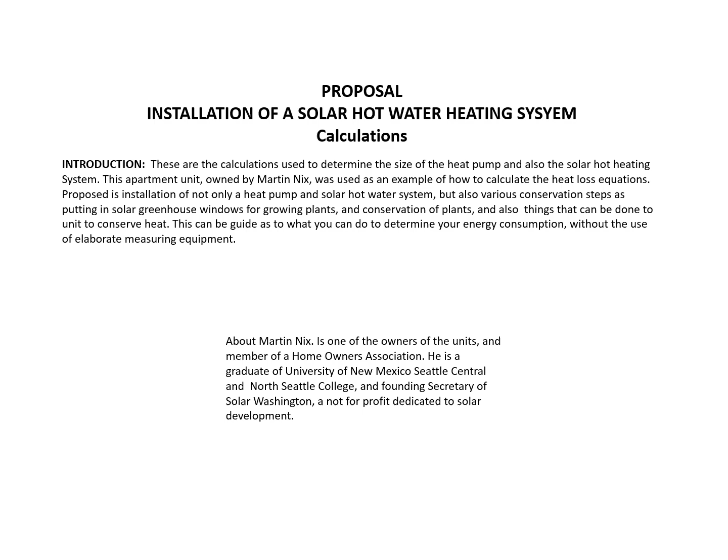So what I'm doing here is I'm looking at how big of a solar hot water heating system I can use and how much heat pumps. And I'm going to talk about other things that you can do to make the house more energy efficient. I took my bills and I looked at how many kilowatts I was using for each month. I don't have natural gas, so this is an all electric unit.

So my highest was about 6 million BTUs per month. My lowest was about 1 million or about 2 million BTUs per month, which gives me a range. You know, wintertime you tend to use more electricity because you got electric heating. So that just gave me a few ideas of where I'm looking at.

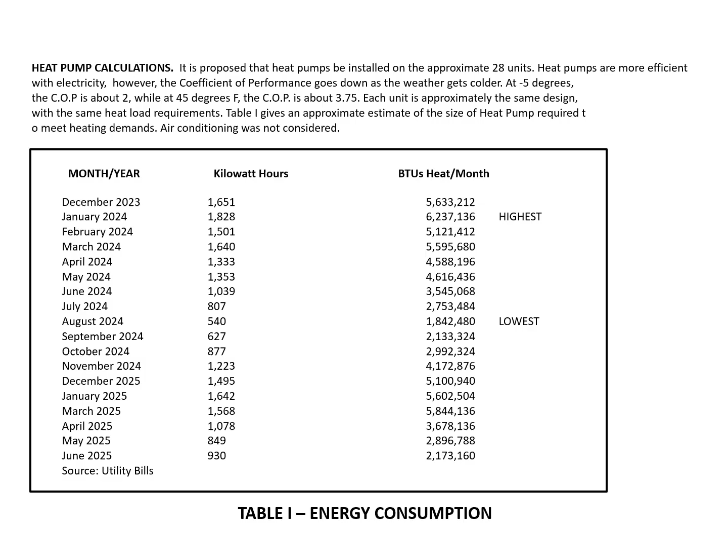To convert kilowatt hours to BTUs, let me put it this way. For every kilowatt out there, there's about 3,000 BTUs. BTUs is a measurement of heat, and kilowatts is more of a measurement of electricity. So here I looked at how much energy is used by my furnace. And by looking at the differential between the highest and lowest, I decided that 29.5% of the heat is used by my furnace to keep the unit warm, or about 30%.

So it just gives you an idea of how you can take your electric bill and come up with how much electricity is being used to heat the place in the wintertime. And I looked at my circuit breaker. I calculated how many kilowatts I'm using, and then I converted it from kilowatt hours to BTUs. For my main, which is the whole house, my house is rated at 22 kilowatt hours,

which is huge. The furnace was 74, the range was 37, and then I had central vacuum, lights, dryer, hot water heater was big, kitchen plugs was big, disposal and lights. Basically, the furnace is the biggest unit, the hot water tank is the biggest unit, and the reason why they do kitchen plugs is because they got a lot of things people plug in that consume a lot of electricity.

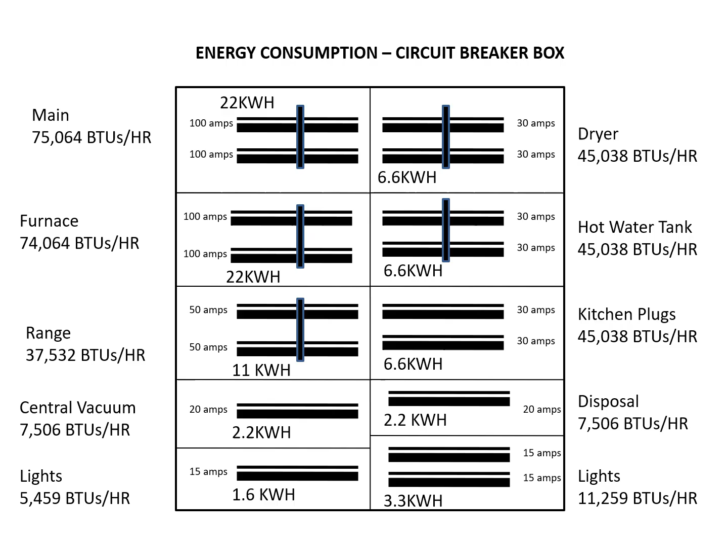Each unit here consumes 22 kilowatt hours, and let's put it this way. The electric utility is kind of concerned that we might melt the power line, so consequently there's talk about trying to put in heat pumps and solar hot water heating systems. There are things that can be done.

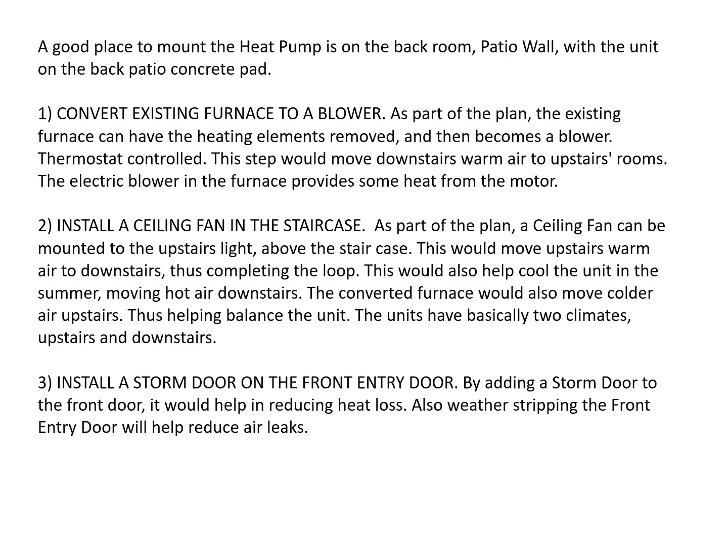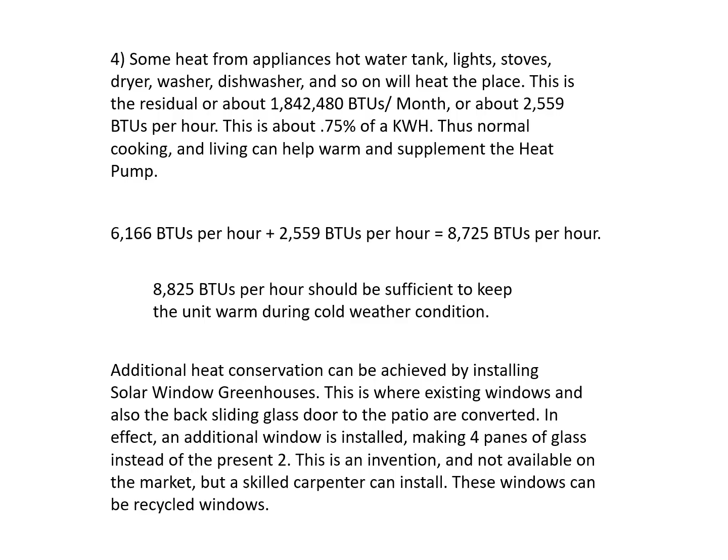If we install a heat pump, we can take the existing furnace and make it into a blower only, install a ceiling fan since I have a double-decker unit, and that way I can blow hot air downstairs and cold air upstairs. Install a storm door. You can also do this to windows, but a storm door would save a lot of heat going out through the front door. And something else too, your appliances, your stove and your washing machines add a little bit of heat to the building.

Things I'm doing is calculating the surface area. I need to know how much surface area I have for my windows, surface area for the wall, surface area for the roof, and surface area for the floor. And then I do a rough calculation as to how much heat's going through the walls. It's called the R value.

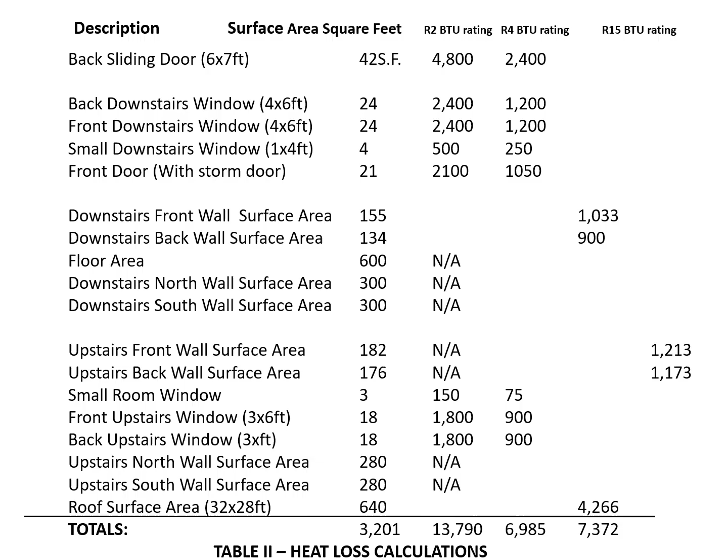So what I did is I calculated what would happen if I added a solar window greenhouse to all the windows, and it gave me a 32% efficiency. Basically, I'm putting a little greenhouse to grow plants on each one of the windows. It also adds an extra layer of glass.

And so then I made a worst case analysis as to how much heat would be lost through it. I assumed that the worst case would be negative 20 degrees in the winter, and that's like a really bad winter storm. I took a guess at how much hot water heating, 60 gallons per day, 120 gallons per day, and then I calculated what the solar potential was.

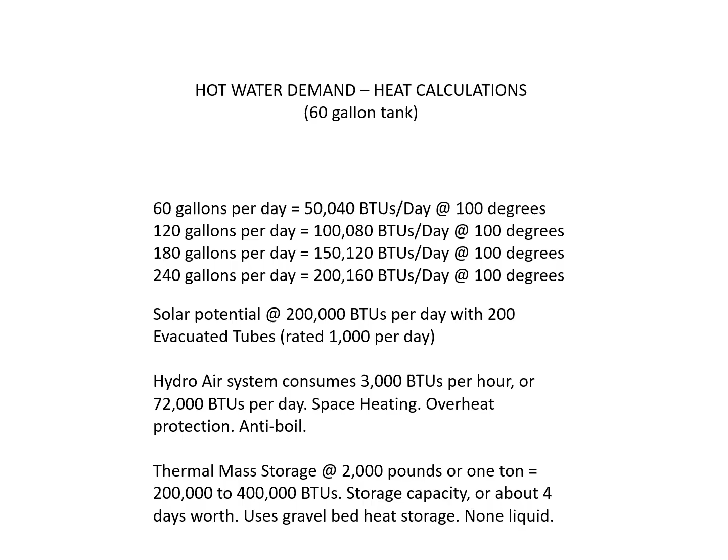200 evacuated tubes. Each one is rated 1,000 BTUs per day, and I'm also using some of the hot water to heat the house. So this gave me an idea of how much demand I need for hot water from a solar hot water heating system. And just as a big guess, I figure the house weighs 300,000 pounds or so.

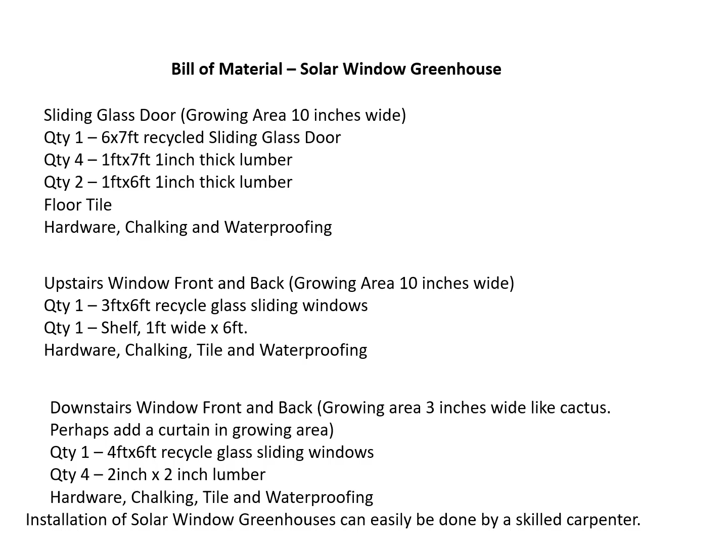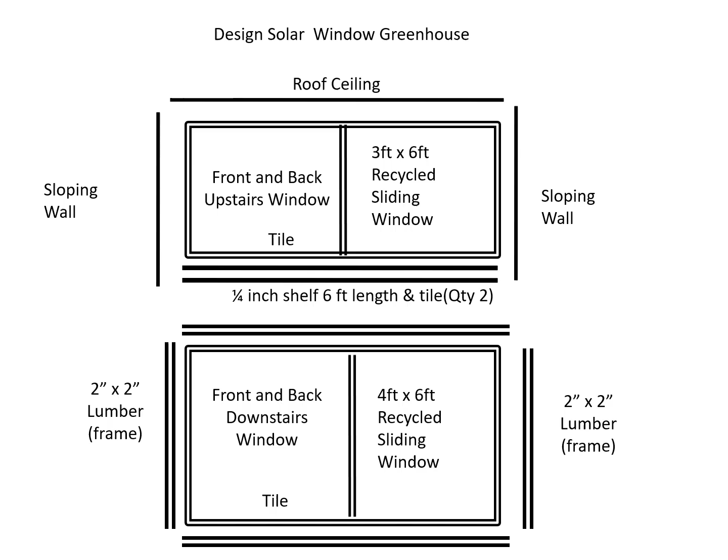So one of the things I want to do is convert the greenhouse windows, and so I went through and calculated how much heat would be conserved if I was to convert the windows to be solar greenhouses. And this is a bill of materials. Basically it's really simple to do. A good carpenter can do this. You basically take recycled windows, put them in there, frame it, and that way you are able to grow plants in your window.

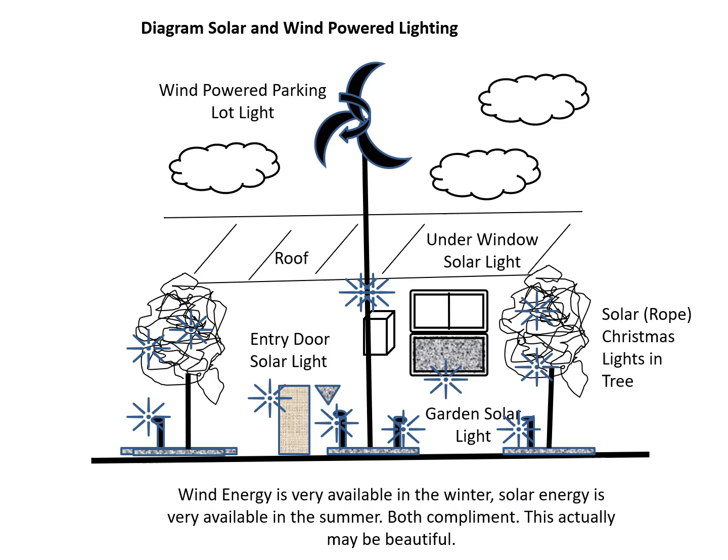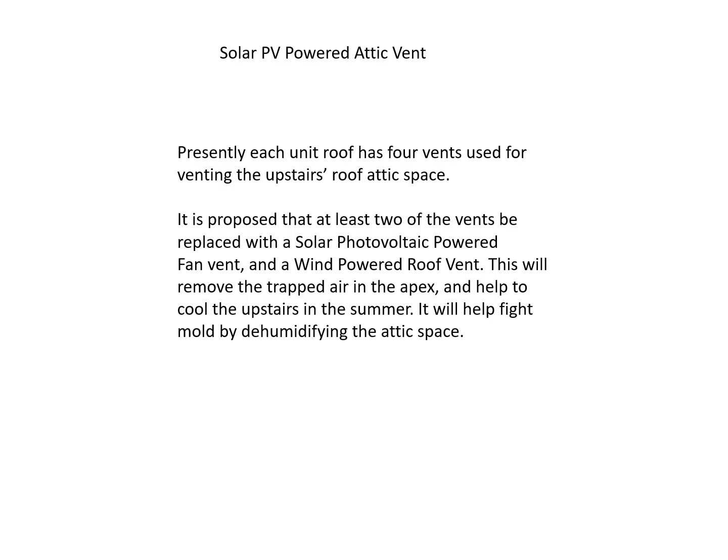Outside, what can be done is solar lighting, and also a windmill that will do lighting. Windmills tend to give more light in the winter time, and solar more in the summer. And so here's a little sketch of what it could look like. And then a solar powered attic fan to keep the roof cool. And then things you can do for fire prevention. Every energy plant should have fire prevention integrated.

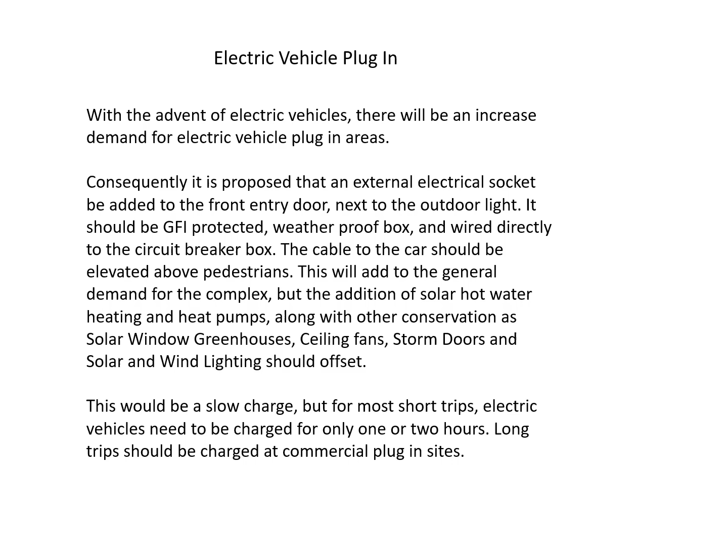Electric vehicle plug-in. You can put in just a regular plug outside, wired directly to the circuit breaker box, and then you can have 1 kilowatt. That'll be a trickle charge. And so after you've done all these calculations, now you size the solar hot water heating. As it ends up, I have close to 100,000 to 200,000 BTUs potential on my roof, and then you use the solar PV panels for the pump.

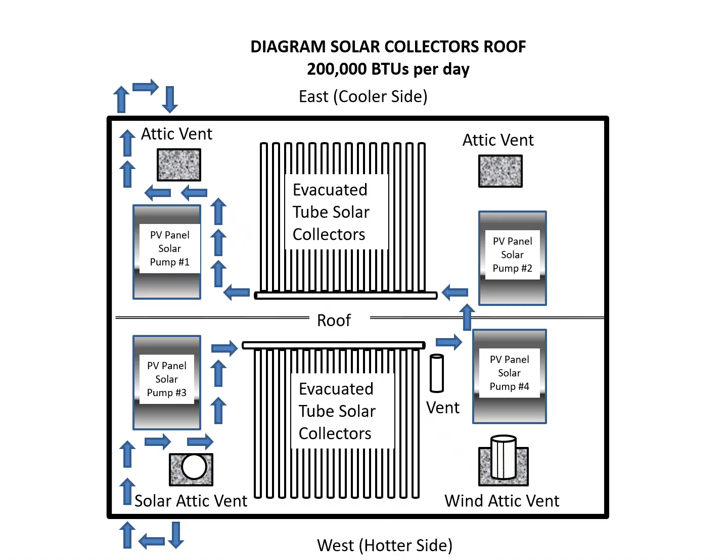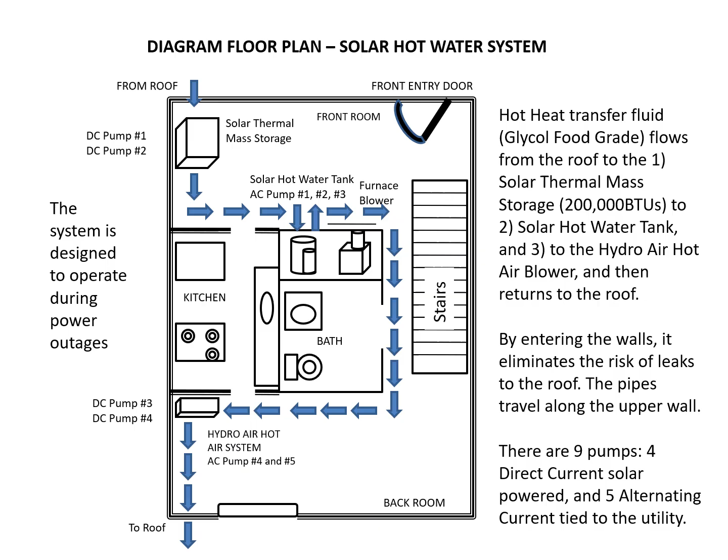And then I route it through the wall, not through the roof. That way it keeps me from leaks. And then I route the pipes along the edge of the walls to the solar hot water heating system, and then out the back. And then I have a hydro air hot air system which can heat the back room. And then I add thermal storage and a couple of pumps to route the heat transfer fluid through a gravel bed. That way I don't have to worry about it.

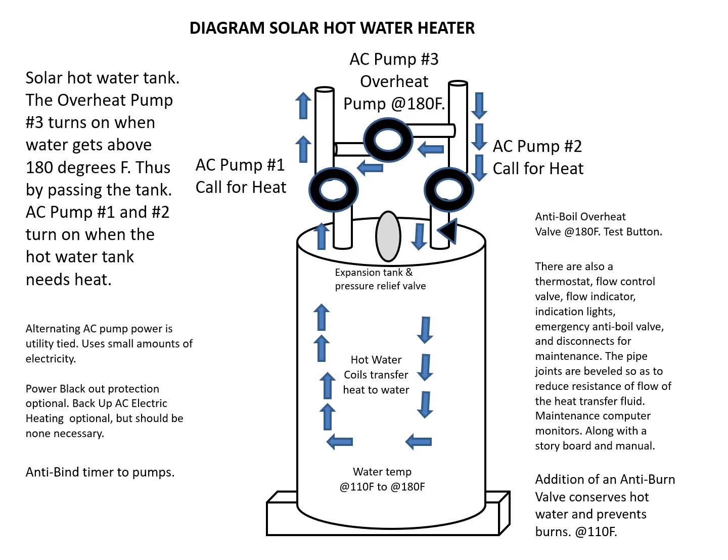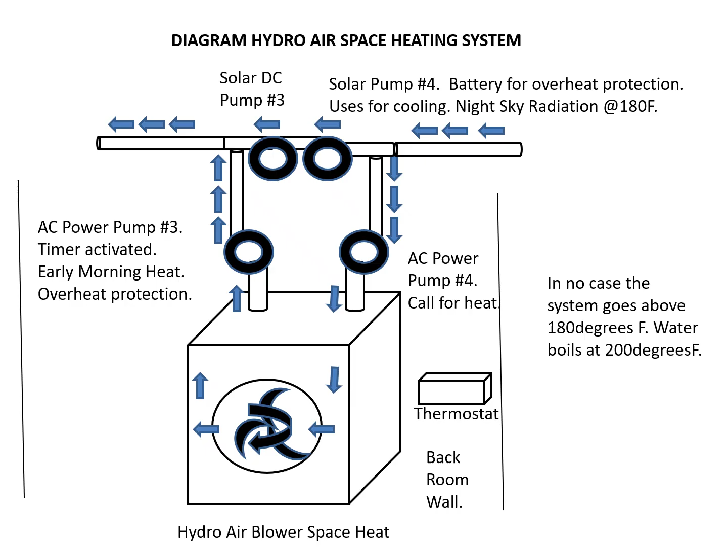Now, one thing about solar hot water heating, you've got to make sure it doesn't boil. So there's an overheat pump, using night sky radiation to cool down in case it ends up being too hot. You don't want to boil the water. Night sky radiation means you operate the pumps at nighttime, radiating heat to outer space. That way you don't boil the water. You've got to do maintenance for the heat transfer fluid as well.

Now, one of the things that you can do to finance it, you can form your own micro utility. I call it a solar wind micro public utility. That way you can finance it for an apartment or several apartments. So with that, what I see here is a potential of 200,000 BTUs per day for the solar heating system. But let me point out, you're going to have to run this past a professional engineer. But any heat pump installer can run these calculations for you.